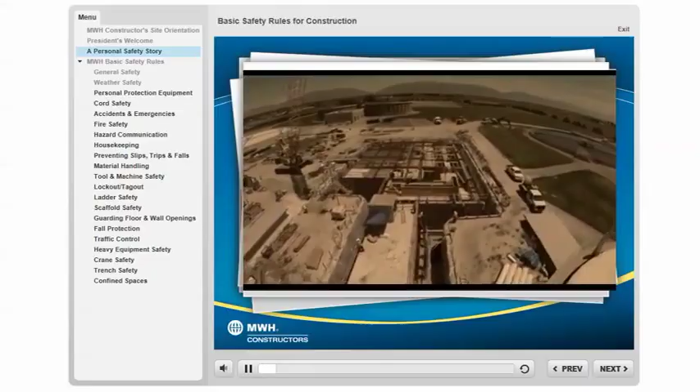At this point, we're 2 years into construction. The job is going well. In fact, the only significant piece of work we have left to complete is the new headworks facility.

March 24th begins like every other day on the construction project with a 7 a.m. safety meeting. The weather that morning was a mixture of sleet and snow and rain, but that's not unusual for Ogden during the winter. And so when the safety meeting completed, work began as usual.

I made my way back to the office trailers. At 8:30 that morning, I got a call from our superintendent down at the headworks facility. He said, 'Ben, there's been an accident and emergency personnel are on their way.'

So I immediately made my way down to the headworks, and it was there that I found one of our construction employees on the ground, and the MWH safety professional was giving CPR.

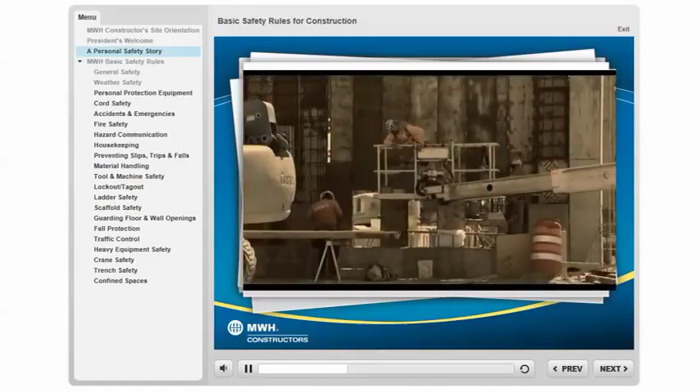The employee's name is Jeremiah. Jeremiah is the foreman for our masonry subcontractor. And that morning, Jeremiah and his crew were building a chimney to encase a large exhaust duct.

Now the chimney was quite high, and Jeremiah and his guys were working off scaffolding at about 45 feet in the air.

There weren't any eyewitnesses to the event, but his crew all reported the same thing, which is at one moment Jeremiah was there working with them, building the chimney. The next minute they heard a loud noise and Jeremiah was gone. Jeremiah had fallen from the scaffolding to the ground below.

It wasn't just a couple minutes after I got on the site that emergency paramedics arrived and they took over the CPR.

Within a short time period after that, the Flight for Life helicopter landed. It landed nearby on a flat area, and the paramedics transported Jeremiah over to the helicopter, and I was right behind. When I got to the helicopter, I talked to the paramedics, and that's where I found out that Jeremiah had passed away.

The accident happened on a Thursday. The job site was shut down on a Friday, and I think I spent most of that weekend in shock. The true impact of what had happened didn't hit me until early the following week, and that's when I attended the funeral service. March 24th, 2011, the day that safety took on a very personal meaning for me.

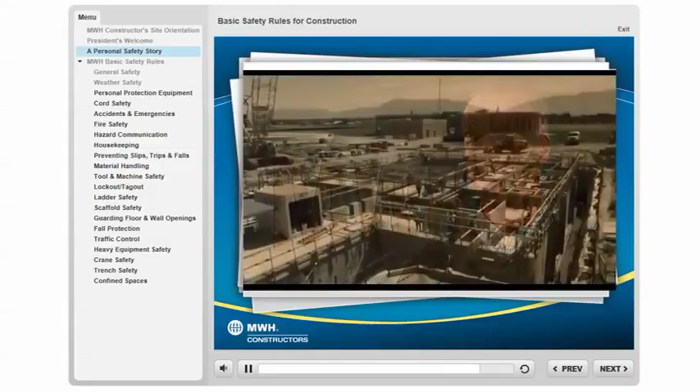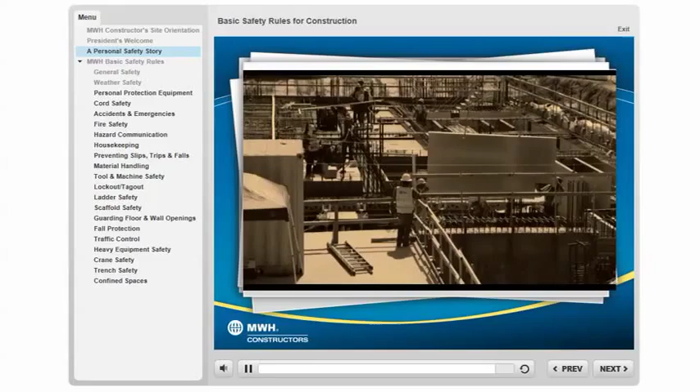In the construction industry, we talk a lot about safety. We talk about the importance of safety planning. We talk about having the right tools and the right equipment. And we talk about how we measure ourselves, days without a lost time incident and other metrics.

All of that's important. But the thing that really matters, the thing that truly matters at the end of the day, is that you go home safely to be with your friends and family.

Basic Safety Rules for Construction, an Employee Orientation and Training Manual by MWH Constructors, Building a Better World.

You have all received your copy in either English or Spanish of the MWH Basic Safety Rules for Construction book. We are going to spend the next 50 minutes reviewing the safety rules outlined in this book. Please pay close attention. At the conclusion of the computer-based training, you will be asked to acknowledge that you have read or have had read to you the rules listed in this handbook.

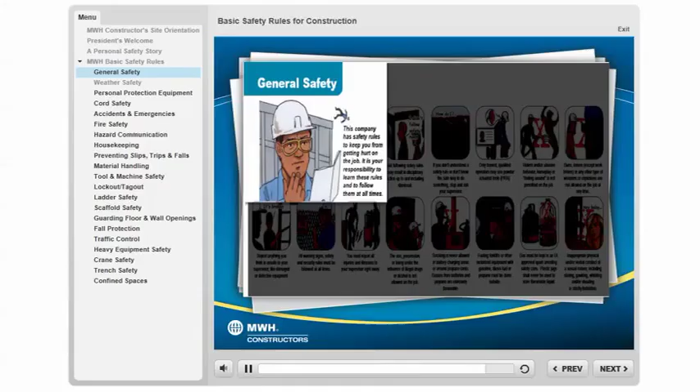General safety. This company has safety rules to keep you from getting hurt on the job. It is your responsibility to learn these rules and follow them at all times. Not following safety rules may result in disciplinary action, up to and including dismissal. If you don't understand a safety rule or don't know the safe way to do something, stop and ask your supervisor. Only trained, qualified operators may use powder-actuated tools, PATs.

Violent and/or abusive behavior, horseplay, or fooling around is not permitted on the job. Guns, knives, except work knives, or other types of weapons or explosives are not allowed on the job at any time.

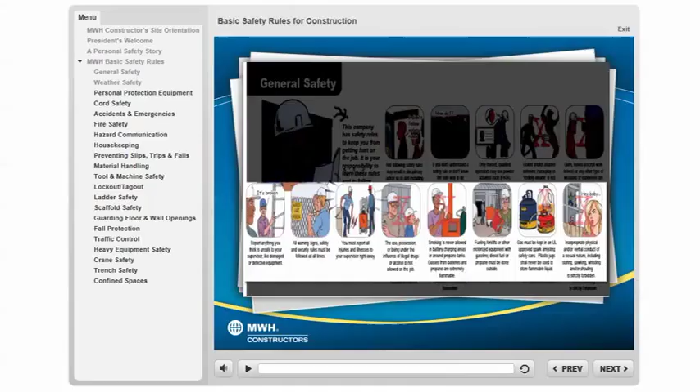Report anything you think is unsafe to your supervisor, like damaged or defective equipment. All warning signs, safety, and security rules must be followed at all times. You must report all injuries and illnesses to your supervisor right away. The use, possession, or being under the influence of illegal drugs or alcohol is not allowed on the job.

Smoking is never allowed in battery charging areas or around propane tanks. Gases from batteries and propane are extremely flammable. Fueling forklifts or other motorized equipment with gasoline, diesel fuel, or propane must be done outside. Gas must be kept in UL-approved spark-arresting safety cans. Plastic jugs shall never be used to store flammable liquid.

Inappropriate physical and/or verbal conduct of a sexual nature, including staring, gawking, whistling, and/or shouting, is strictly prohibited.

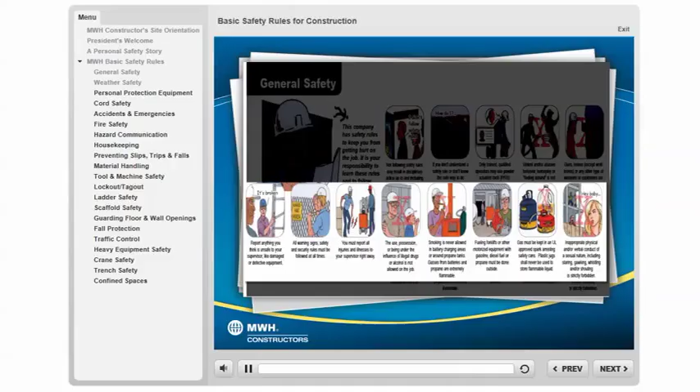Weather safety. Drink plenty of fluids. Dehydration can happen in hot or cold weather. Don't wear tight clothes. They can make your body's job of circulating coolant or antifreeze, which is blood, much harder, like pinching a radiator hose. Don't drink alcoholic beverages before or during work. Alcohol dehydrates or dries out your body and slows your circulation, making you colder or hotter. Avoid smoking cigarettes. Nicotine affects your circulation, making it harder to cool down or warm up.

When it's cold, dress warmly. Use layers of clothes that you can put on or take off as the temperature changes. Don't forget hats, gloves, and warm shoes or boots. Most body heat is lost from your head, hands, and feet. Frostbite and hypothermia are serious conditions. If you think you're getting either, tell your supervisor and get medical attention if necessary.

When it's hot, try to wear lightweight or light-colored clothes. Light colors reflect heat. Dark colors absorb heat. With heat illnesses, you might stop sweating and/or have dizziness, cramps, nausea, and intense thirst. Heat illnesses are serious conditions. If you or one of your coworkers is having heat illness symptoms, get inside or wherever you can cool down. Tell your supervisor and get medical attention if necessary.

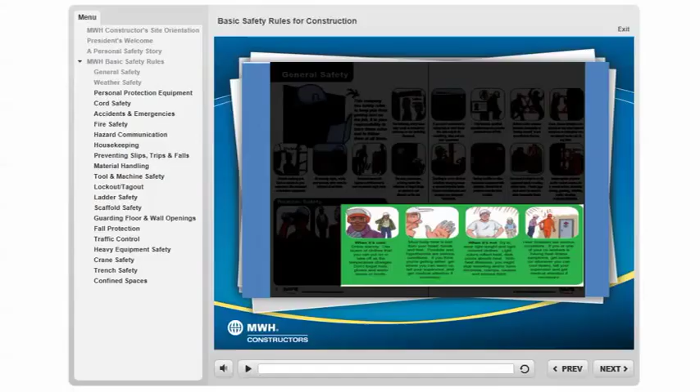PPE, personal protective equipment. There are different types of PPE for different jobs. If you don't know what PPE you should be using, ask your supervisor. There are many kinds of respirators to protect against breathing harmful dusts, mists, and fumes. Respirators don't work if they don't fit properly. Fit test your respirator before each use.

Number 1, put on the respirator. Number 2, cup your hands over the mask or otherwise block the flow of air into the mask. Number 3, breathe in deeply. The mask should collapse towards your face. When you breathe out, the mask should remain sealed on your face. It fits if it doesn't leak air from around the edges when you breathe in and out. If it doesn't fit, tell your supervisor.

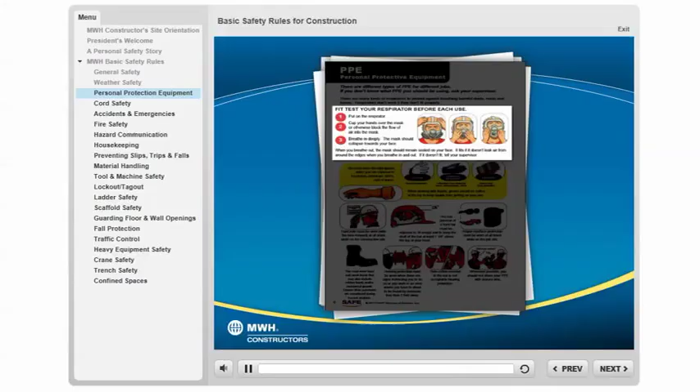You must wear the right gloves when you are exposed to hazardous chemicals, BBPs, cuts, or burns. Cotton, general protection. Chemical resistant, protection from chemical burns, harmful liquids, BBPs. Leather, heavy-duty, dry protection. When working with liquids, gloves should be cuffed at the top to keep liquids from getting on your arm.

Hard hats must be worn with the brim forward at all times while on the construction site. The suspension of a hard hat must be adjusted to fit snugly and to keep the shell of the hat at least 1 1/4 inch above the top of your head. Proper eye-face protection must be worn at all times while on the job site.

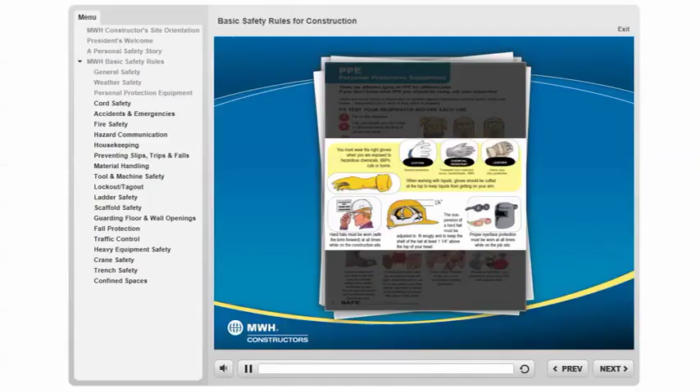You must wear hard-soled work boots that may also include rubber boots and/or metatarsal guards. Ensure shoe punctures are considered during hazard analysis. Hearing protection must be worn where there are signs instructing you to do so, or you work in an area where you have to shout to be heard by someone less than 2 feet away. Plain cotton inserted in the ear is not acceptable hearing protection. Whenever possible, you should not share your PPE with anyone else.

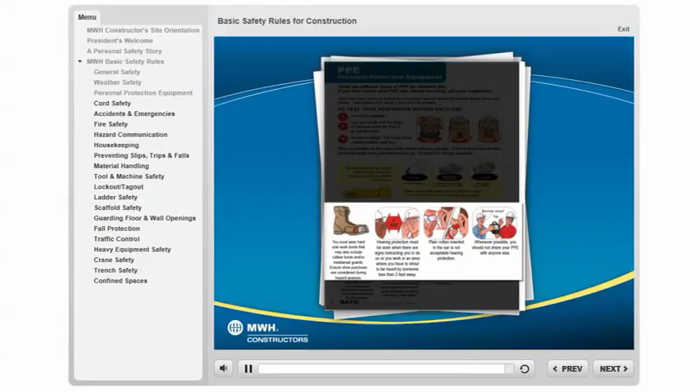Cord safety. The most common cause of on-the-job electrocutions is using the wrong type or damaged extension cords. Check cords carefully before each use.

If a cord is damaged in any way, is missing a grounding pin, or has been spliced together, remove it from service and clearly label or tag it as damaged so no one else can use it. Only use cords that are approved for hard or extra hard service.

These cords will be marked every few feet. Markings include S, ST, SO, STO, SJ, SJO, SJT, and SJTO. Extension cords should not be used as permanent wiring.

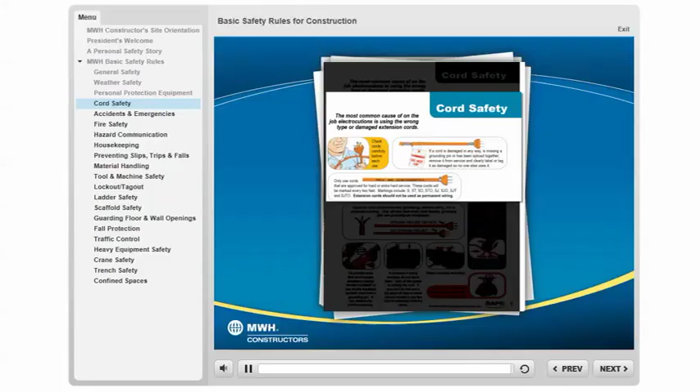If any equipment or cord gives you even a slight shock when you touch it, unplug it and tell your supervisor right away. When using adapters, you must screw the outlet cover plate screw through the grounding lead to ground the connection. Grounding pins will not protect unless they are connected to a grounding pin receptacle.

Approved cords will be 3-wire, grounding, stranded wiring, with a protective covering. They will also have strain relief devices, grounding pins, and grounding pin receptacles.

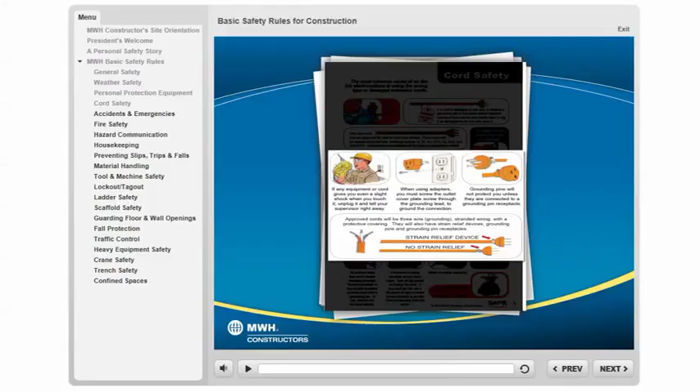To keep cords safe and free of damage, pull the plug, not the cord. Never alter a GFCI or grounding pin. Don't yank cords around sharp corners, and don't leave cords where they can be run over.

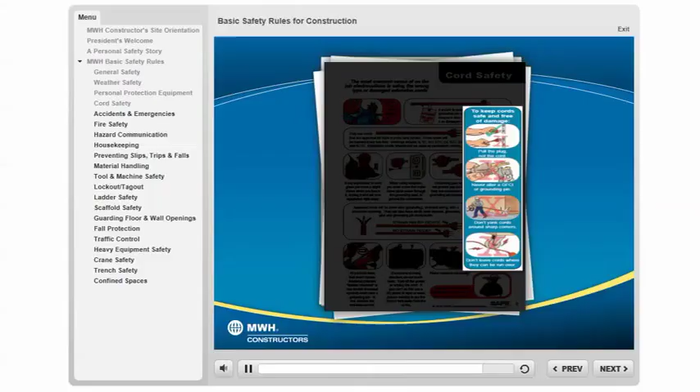All portable tools that are not double insulated or marked double insulated or have double insulated symbols must have a grounding pin. If not, remove the tool from service.

If someone is being shocked, do not touch them. Turn off the power or unplug the cord. If you can't do this, use a dry piece of rope or wood, such as a broom handle, to pry the cord or tool away from the victim.

Water conducts electricity. Use cords long enough for the job. Don't string or connect cords together.

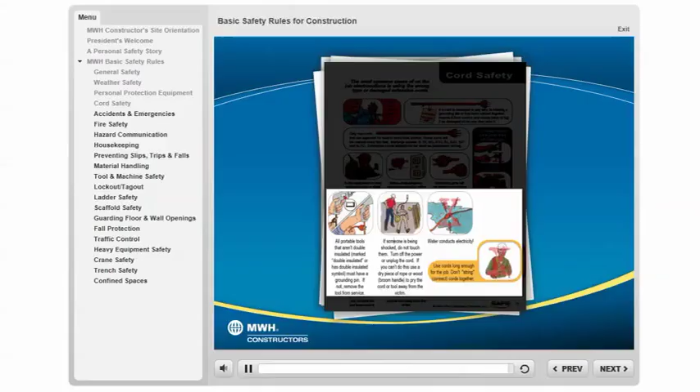Accidents and emergencies. Accidents happen. Being prepared can be the difference between life and death. This company keeps well-stocked first aid kits, fire extinguishers, and posts emergency phone numbers at every job site.

You must know: 1. Where first aid kits are kept. 2. Where phones and emergency numbers are posted. 3. Where fire alarms and/or extinguishers are located. 4. Emergency evacuation routes to get out of the building quickly.

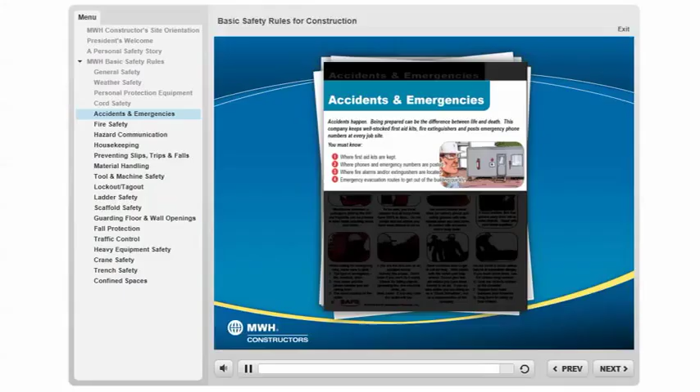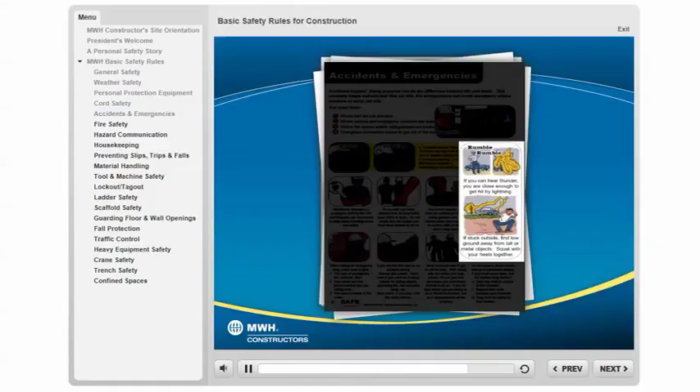If you can hear thunder, you are close enough to get hit by lightning. If stuck outside, find low ground, away from tall or metal objects. Squat with your heels together.

Watch. Warning. A weather watch means conditions are right and that type of weather might happen. A weather warning means that type of weather is happening in the watch area.

Blood-borne diseases or pathogens, BBPs, like HIV and hepatitis, can be present in body fluids, including blood and saliva. To be safe, you must assume that all body fluids have BBPs in them. Do not render first aid unless you have been trained to do so.

You should always wear latex or rubber gloves and safety glasses with side shields when you may come in contact with someone else's body fluids.

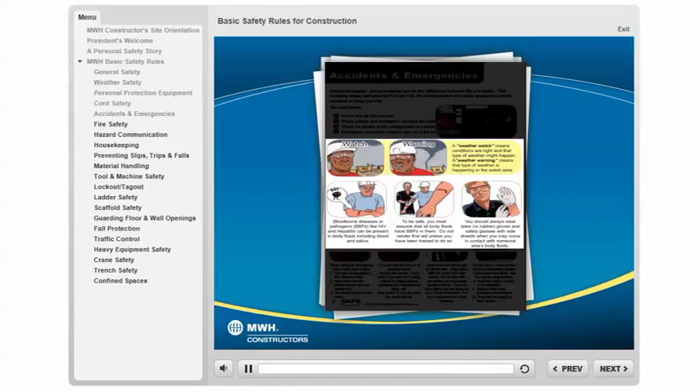When calling for emergency help, make sure to give: 1. The type of emergency, fire, medical, other. 2. Your name and the phone number you are calling from. 3. The exact location of the victim.

If you are the first one on an accident scene, survey the scene. Don't enter if you can't do it safely. Check for falling objects, spreading fire, live electrical wires, and so forth.

Stay calm. If you stay calm, the victim will too. Send someone else to get or call for help. Wait calmly with the victim until help arrives.

Do not give first aid unless you have been trained to do so. If you do take action, you are doing so as a good Samaritan, not as a representative of the company.

Do not move a victim unless they are in immediate danger. If you must move them, use the clothes drag method.

1. Grab the victim's clothes at the shoulder. 2. Support their head between your forearms. 3. Drag them to safety by their clothes.

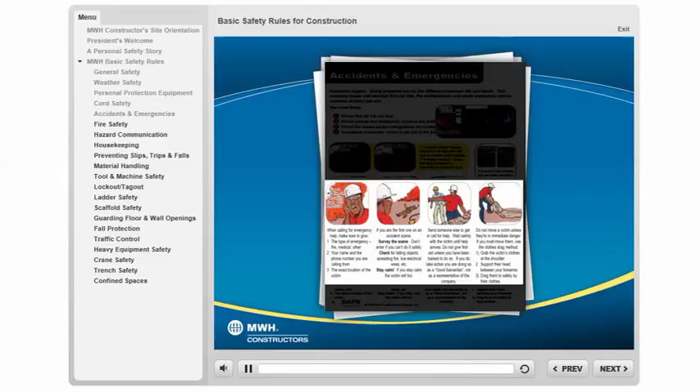Fire safety. Fire needs 4 things to burn. Fuel, anything that will burn, such as solid, liquid, or gas. Heat, the energy to increase the temperature of the fuel to the point the fire starts.

Oxygen, fire needs about 16% oxygen. The air we breathe is about 21%. And chemical chain reaction, when heat, oxygen, and fuel come together in the right amounts and conditions to start a fire. If one of these things is missing, fire will not burn.

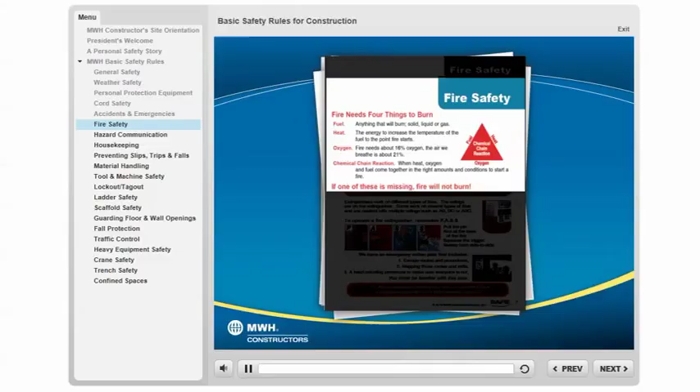There are 3 basic types of fires. They are rated by the type of fuel that is burning. Class A, ordinary solid fuels like paper, wood, cloth, rubber, and some plastics. Class B, flammable liquids or gases like gasoline, paints, propane, etc. Class C, electrical fires. Extinguishers work on different types of fires.

The ratings are on the extinguisher. Some work on several types of fires and are marked with multiple ratings, such as AB, BC, or ABC.

To operate a fire extinguisher, remember PASS. P, pull the pin. A, aim at the base of the fire. S, squeeze the trigger. S, sweep from side to side.

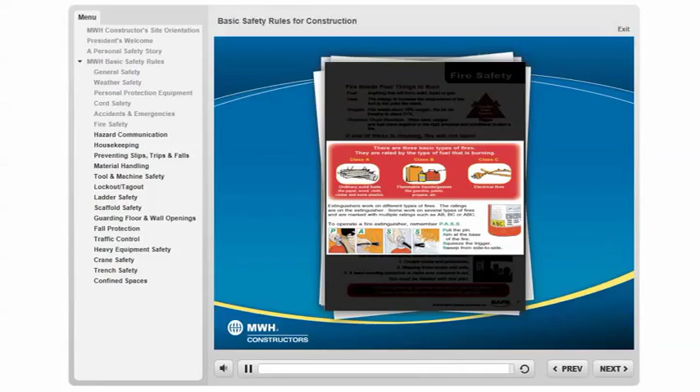We have an emergency action plan that includes escape routes and procedures, mapping these routes and exits, and a head counting procedure to make sure everyone is out. You must be familiar with this plan.

If a fire is spreading, blocking your exit, or you don't have a proper extinguisher, don't take chances. Get out.

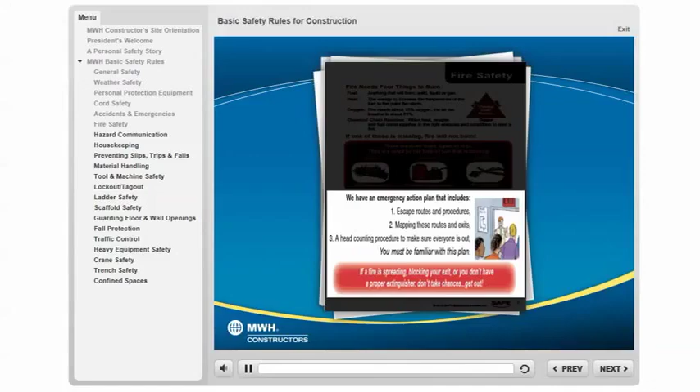Hazard communication. Paint thinner, concrete products, adhesives, coatings, and other chemicals that we use every day may contain chemicals that could hurt you. That is why we have a written Hazard Communication Program, or HAZCOM, that includes hazard evaluation, chemical manufacturers finding out what and how the things they make are hazardous.

Container labeling, making sure that all hazardous materials have product warning labels. Material safety data sheets, MSDSs, have detailed information about the hazardous materials we may handle, and training so that you can do your job safely.

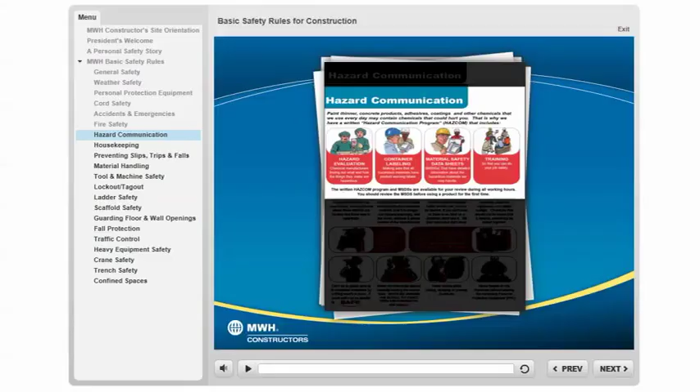The written HAZCOM program and MSDSs are available for your review during all working hours. You should review the MSDS before using a product for the first time. We keep an MSDS on every hazardous material you may handle. You must know where these MSDSs are located and know how to read them.

All hazardous material containers must have labels that describe the hazardous material, how it is dangerous, such as hazard warnings, and the name, address, and phone number of the manufacturer. If something is poured into another container, such as a bottle or bucket, it must be labeled.

If you can't read it, or there is no label on the container, don't use it. Tell your supervisor right away. Don't store chemicals near heat, electrical equipment, or in direct sunlight.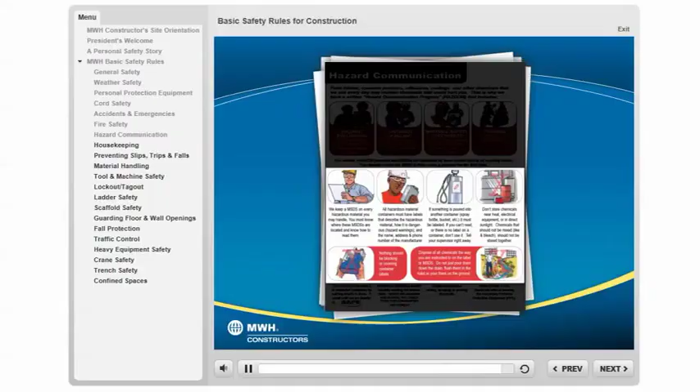Chemicals that should not be mixed, such as ammonia and bleach, should not be stored together. Nothing should be blocking or covering container labels. Dispose of all chemicals the way you are instructed to on the label or MSDS. Do not just pour them down the drain, flush them in the toilet, or pour them on the ground.

Never try to guess what's in unlabeled containers by sniffing what's in them. A small sniff can be deadly. Never mix chemicals without carefully reading the instructions. Never mix ammonia and bleach. The fumes from this combination are deadly.

Never smoke while mixing, spraying, or pouring chemicals. Never handle or mix chemicals without wearing the necessary personal protective equipment, PPE.

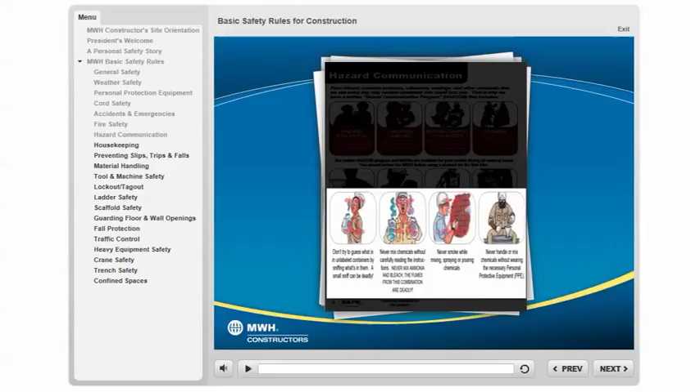Housekeeping. How neat and clean we keep our workplace shows our level of pride and professionalism. It also helps keep our workplace safe. Keep work areas, walkways, stairs, and aisles free of clutter like waste, trash, tools, hoses, and cords.

Secure loose materials and scrap that might blow around, especially on roofs or other heights. Keep debris and stored materials at least 10 feet away from deck edges and at least 6 feet from floor and/or roof openings. Place oily rags and swabs in approved covered receptacles.

Pick up tools, hoses, and so forth after each use. Remove or flatten protruding nails from scrap lumber.

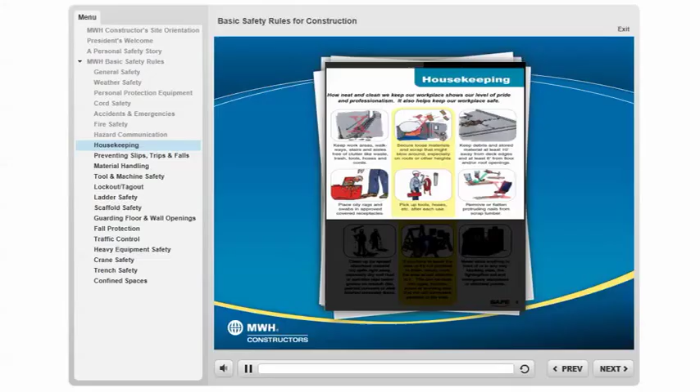Clean up or spread absorbent material on spills right away, especially drywall mud or sprinkler pipe leaks or grease on smooth tile-painted concrete or slick-finished concrete floors.

If you have to leave the area or it's not practical to finish, clearly mark the area to call attention to it. This can be done with signs, buckets, boxes, or anything else that will call someone's attention to the area. Never store anything in front of or in any way blocking exits, firefighting, or first aid and emergency equipment or electrical panels.

Preventing slips, trips, and falls. Most slips happen when either your shoes or what you're walking on is wet or slippery. Be careful if it's snowing, icy, raining, wet, or muddy outside, especially when entering smooth floored areas from outside.

Be extra careful when walking through areas where drywall is being finished or sprinkler heads are being cut. Watch where you step. Check for ice, mud, or other slick spots in front of the door when getting in and out of vehicles. Wear proper slip-resistant shoes that are laced and tied at all times.

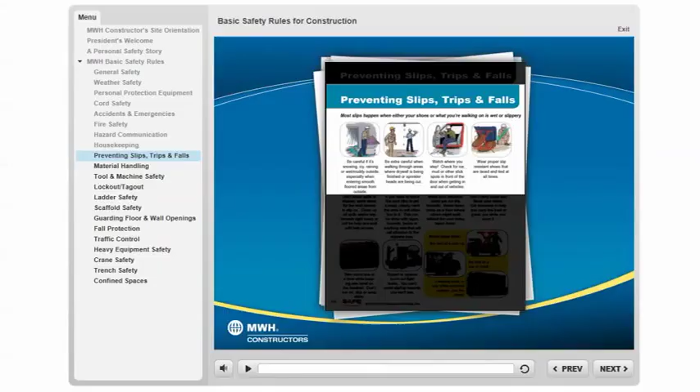Don't leave spills or slippery spots alone for the next person to slip on. Clean up all spills or slip hazards right away, or call for help and wait until help arrives. If you have to leave the spot, like to get a mop, clearly mark the area to call attention to it. This can be done with signs, buckets, boxes, or anything else that will call attention to the slippery area.

Make sure electrical cords are not trip hazards. Never leave cords on the floor where others might walk without the cord being taped down.

Don't carry loads that block your vision. Get someone to help you carry the load or guide you while you carry it. Take stairs one step at a time while keeping one hand on the handrail. Do not run, skip, or jump stairs. Report or replace burned out light bulbs.

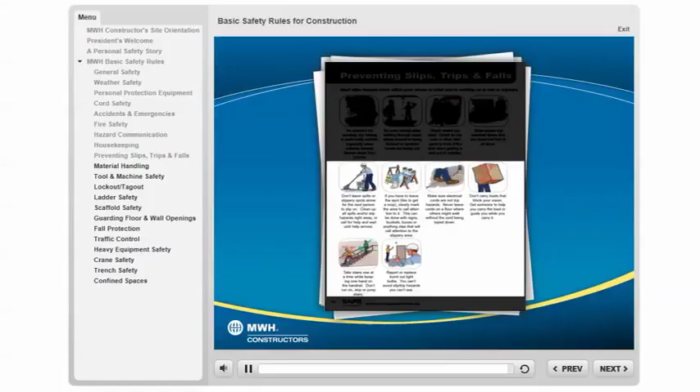You can't avoid slip or trip hazards you can't see. Never jump from the bed of a pickup, the cab of a van or truck, a loading dock, or any other elevated surface. Use the stairs.

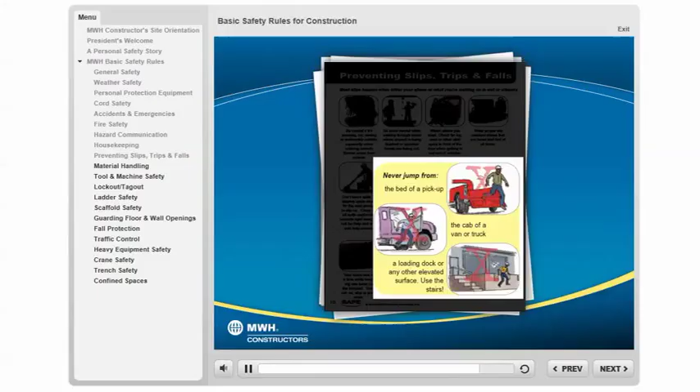Material handling. Lifting light things carelessly and heavy things the wrong way can cause back injuries. When you lift, use proper techniques. Square up to the object as close to it as you can. Your feet should be slightly apart with one foot just behind the other.

Squat down to the load. Bend your knees while keeping your back straight and as close to vertical as possible. Get a good grip using your whole hand, not just your fingers. Gloves should be worn when handling material. Materials to be lifted should be gripped at opposite corners. Lift with your legs while keeping your back vertical and arms and elbows close to your body.

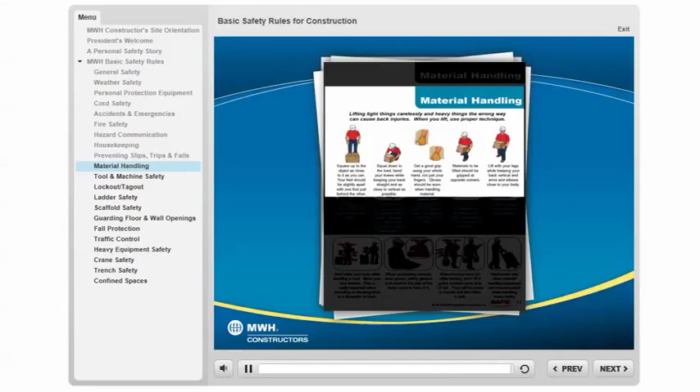Shoveling is the same as lifting, so the same rules apply. Plan before you lift. Check the load for weight, sharp edges, splinters, etc. Make sure your path is free of trip hazards.

If a load is hard to lift and or handle alone, like plywood or sheetrock, get help. Never reach over something to lift something else. Either move what's in your way or go around it. Never lift or handle material by the packing band.

Don't twist your body while handling a load. Move your feet instead. This is really important when shoveling or throwing trash in a dumpster or truck. When unbanding material, wear gloves, safety glasses, and stand to the side of the band, never in front of it.

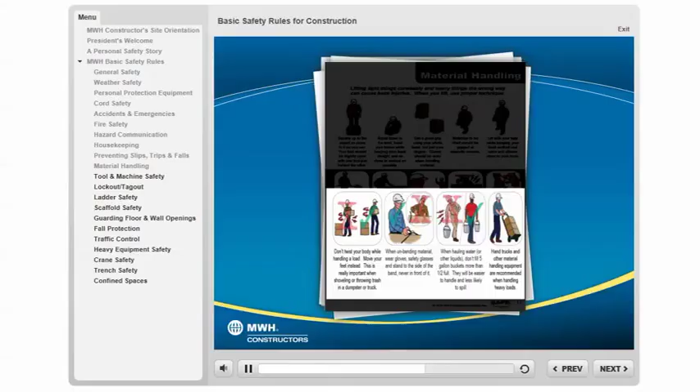When hauling water or other liquid, do not fill 5-gallon buckets more than half full. They will be easier to handle and less likely to spill. Hand trucks and other material handling equipment are recommended when handling heavy loads.

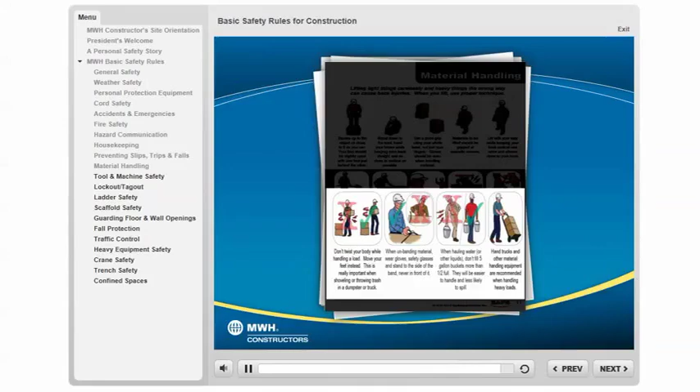Tool and machinery safety. When tools or equipment are designed to have guards, the guard must be on when the tool or equipment is in use. Never alter or bypass machine guards in any way. Ingoing nip points, the point where a belt or chain is pulled onto a gear or wheel, must be guarded.

Grinders must have side shields over the end of the stone or wire wheel, and tool rests within 1/8 inch of the stone or wheel. Circular saws must have guards above and below the base plate that automatically return to the covering position when the saw is pulled out of the work. Keep saw blades adjusted so they are deep enough to do the work, but no deeper. Use push sticks or other hand tools to help keep your hands out of the danger zone.

Carefully inspect all pneumatic tool lines and connections for damage before each use. Make sure pneumatic tools are firmly connected to the hose before using the tool.

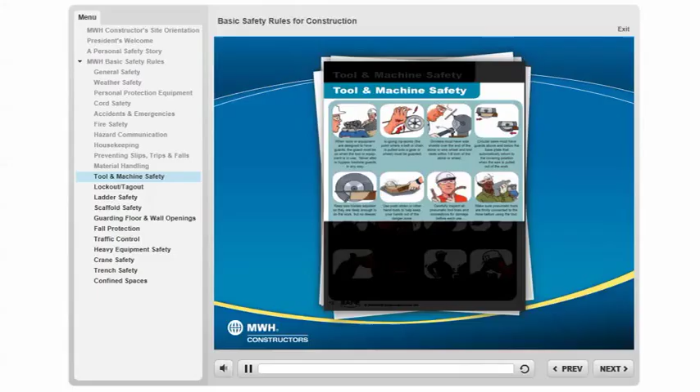Carefully inspect all chains, slings, hooks, and latches before each use. Never use wrenches that have been sprung to the point where slippage occurs. Impact tools, chisels, and so forth must not have mushroomed heads.

Gas cylinders that are not in use must be secured in an upright position with valve protection caps on. Gas cylinders that are in use must be secured in a cart with the regulators attached. Oxygen and acetylene cylinders must be separated by at least 20 feet when not in use.

Don't wear gloves or loose clothing, especially clothes with drawstrings, when working on or with moving machinery. If you have long hair, tie it back or put it up under a hat before working with, on, or around moving machinery.

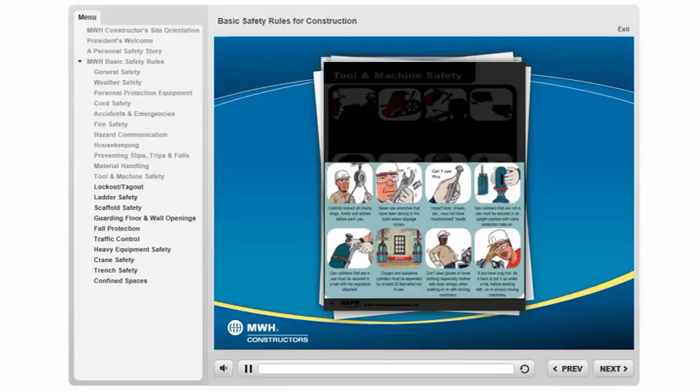Lockout, tagout. If you are in a situation where the unexpected startup of machinery, electrical current, or the release of stored energy could hurt you, lockout, tagout (LOTO) rules must be followed.

1. To LOTO a piece of equipment, turn it off: press stop, flip the switch, close the valve, etc. 2. Isolate it from the energy source: unplug it, flip the circuit breaker off, close the main valve, etc.

3. Put on and lock and/or tag energy control devices. Turn it off, isolate it, lock it. 4. Control stored energy, like that found in springs, hydraulic systems, raised or elevated parts, etc., by repositioning, blocking, or bleeding down.

5. Make sure energy is off, stored energy is controlled, and all moving parts, especially moving saw blades, have stopped before you start working on or near them.

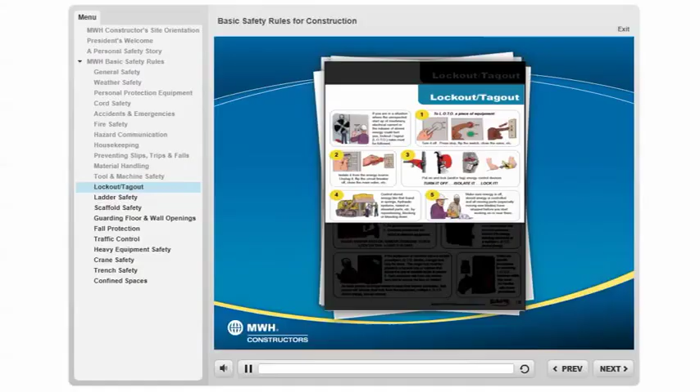Before restarting the equipment, make sure: 1. All tools have been removed. 2. All guards are attached. 3. Everyone knows you are about to start the equipment.

Never tamper with or remove someone else's lock or tag. Leave it alone. If more than one person needs to lock out or tag out equipment, each shall place his or her own personal lock on the energy isolating device or devices, or a multiple LOTO device, HASP. If the equipment or machine will not accept a multiple LOTO device, a single lock may be used. The single key must be placed in a lockout box or cabinet that allows the use of multiple locks to secure it. Each coworker will then use his or her own lock to secure the box or cabinet.

As each person no longer needs to keep their lockout protection, that person will remove their lock from the equipment, multiple LOTO device, HASP, box, or cabinet. There are specific procedures for switching lockout/tagout between shifts. You must be familiar with these procedures.

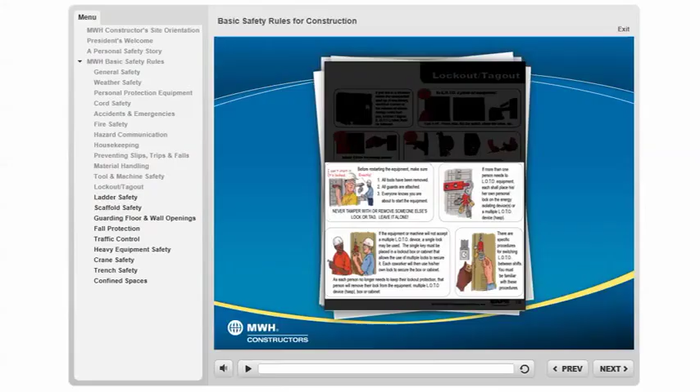Ladder safety. When you need a ladder, use a ladder. Don't use boxes, chairs, or buckets. Set up ladders with the feet 1 foot out from the base of the vertical support for every 4 feet up. The top of the ladder must extend at least 3 feet beyond the landing area. Lock, tie, or otherwise attach the ladder near the top to prevent movement.

Use barricades, cones, or warning tape around the ladder whenever possible. This keeps people from hitting the ladder or getting hit if you drop something. When climbing a ladder, you must keep 3 points of contact with the ladder at all times.

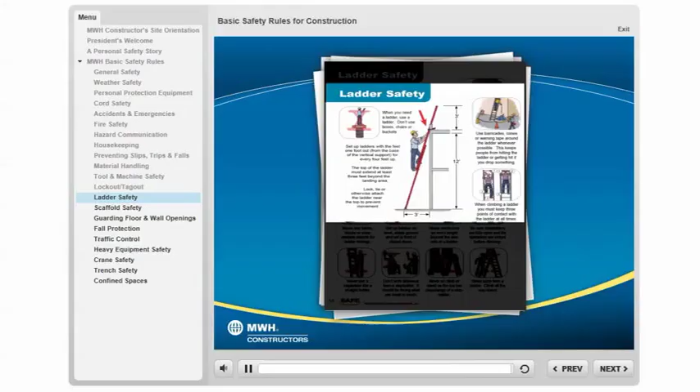Never use bricks, blocks, or other unstable objects for ladder footings. Set up ladders on level, stable ground and not in front of closed doors. Never reach over an arm's length beyond the side rails of a ladder.

Be sure step ladders are fully open and the spreaders are locked before climbing. Never use a step ladder like a straight ladder. Don't work sideways from a step ladder. It should be facing what you need to reach.

Never sit, climb, or stand on the top 2 steps or rungs of a step ladder. Never jump from a ladder. Climb all the way down.

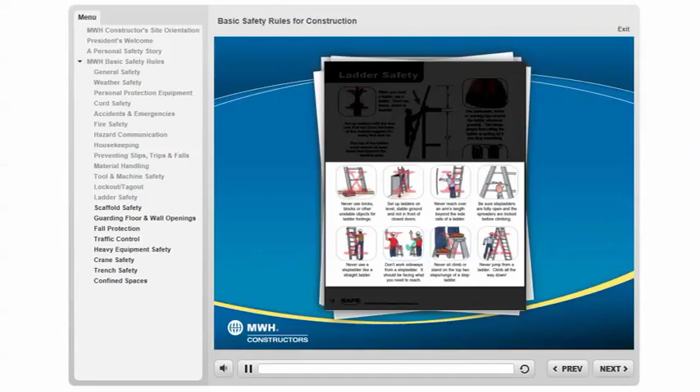Scaffold safety. All scaffolds 10 feet or more above the floor must have the following on all open sides and ends: minimum requirements. Baker requires all of the following, or 100% tie-off requirements shall be met.

A top rail 38 to 45 inches above the work platform. A mid-rail halfway between the top rail and the work platform. A toe board at least 3 1/2 inches high. A screen with holes no bigger than 1/2 inch must be installed between the toe boards and the top rail on all scaffolds where people work or pass underneath.

Railings must be supported at a maximum of every 8 feet. Guardrails are not required on the side of a scaffold platform that is less than 14 inches from the face of the work.

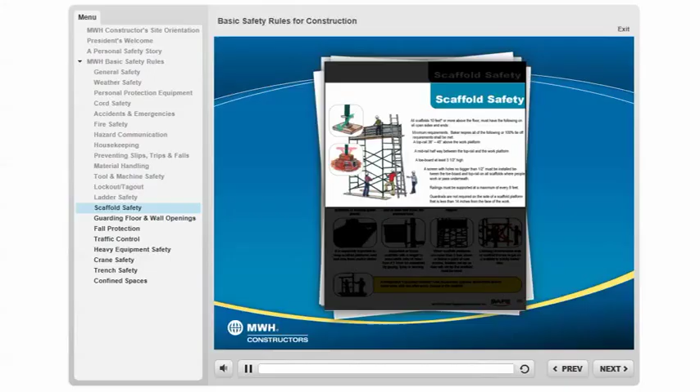Work platforms must be at least 18 inches wide. They may be either fabricated scaffold platforms or scaffold-grade planks. Scaffold platforms must be able to support without failure their own weight and at least 4 times the intended load.

Planks must extend at least 6 inches, but no more than 18 inches beyond the end of their support. Scaffold planks should overlap a minimum of 12 inches. It is especially important to keep scaffold platforms neat and free of trash and/or clutter.

Supported or framed scaffolds with a height-to-base width ratio of more than 4 to 1 must be restrained by guying, tying, or bracing. When scaffold platforms are more than 2 feet above or below a point of safe access, ladders set up so they will not tip the scaffold must be used. Climbing cross braces and/or scaffold frames to get on a scaffold is strictly forbidden.

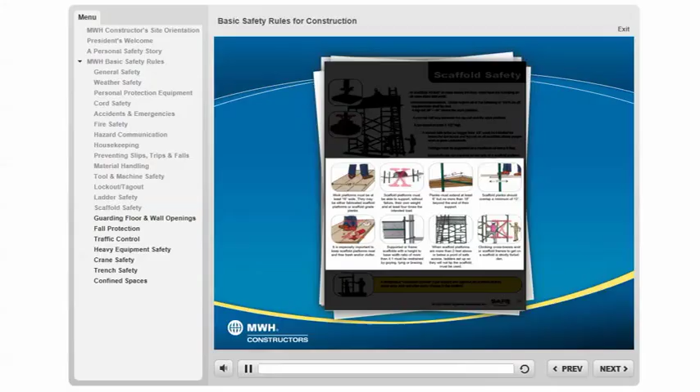A designated, competent person must inspect and approve all scaffolds before every work shift and after every change in the scaffold.

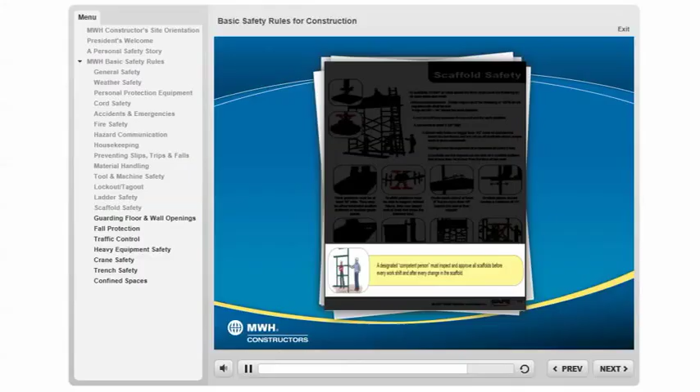Guarding floor and wall openings. All open-sided floors and/or openings where someone could fall 6 feet or more need a standard guarding system. Standard guarding systems include a top rail between 39 inches and 45 inches above the work surface, a mid-rail halfway between the top rail and the work surface, and toe boards when falling material may cause a hazard.

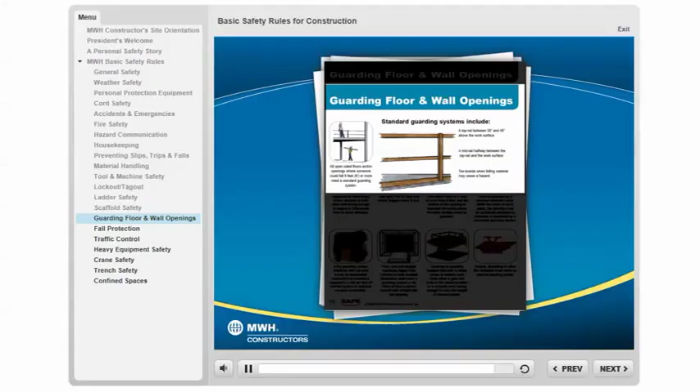Guardrails must be supported at least every 8 feet, secured at both ends, and strong enough to support a 200-pound force in every direction. Wire rope guarding must be kept tight, free of sags, and clearly flagged every 6 feet.

Every window wall opening from which there is a drop of more than 6 feet, and the bottom of the opening is less than 39 inches above the work surface, must be guarded.

Every manhole opening must be guarded by a standard manhole cover. While the cover is not in place, the opening must be constantly attended by someone or protected by a removable guarding system. If the guarding system interferes with the work, it may be temporarily removed if all co-workers exposed to a fall are tied off and the system is replaced as soon as possible.

Floor, roof, and skylight openings bigger than 2 inches in their smallest dimension must have a guarding system or be offset so that a person cannot walk straight into the opening.

Openings in guarding systems that lead to stairs, ramps, or ladders must have either a gate that locks in the closed position or a secured cover strong enough to carry the weight of several people. Drywall, sheathing, or other like materials must never be used as opening covers.

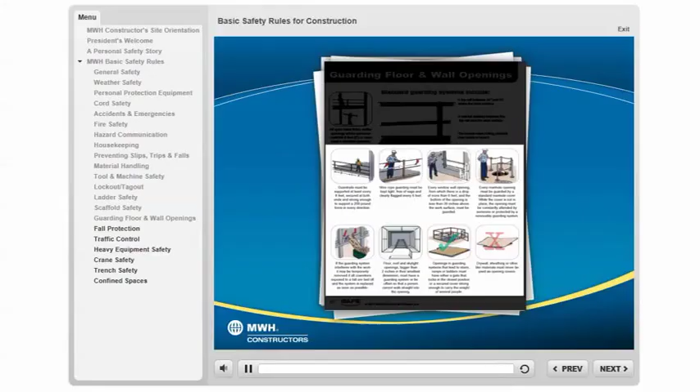Fall protection is required when co-workers could fall 6 feet or more. Certain specific activities like steel erection have different minimum height requirements. If you are unsure about the type and/or need for fall protection, ask your supervisor. Fall protection is required regardless of height when co-workers are working above or next to dangerous equipment.

Conventional types of fall protection include guardrail systems, covers, safety nets, and personal fall arrest (PFA) systems. Before using personal fall arrest equipment, you must be trained. You'll need to know the equipment's limits, proper hookup, anchoring, and tie-off techniques. You must also be trained so that you know how to safely use, inspect, and store the equipment.

Body belts and non-locking snap hooks are not acceptable as part of a personal fall arrest system. Carefully inspect all fall protection equipment before each use. Don't use damaged equipment. Return it to your supervisor right away.

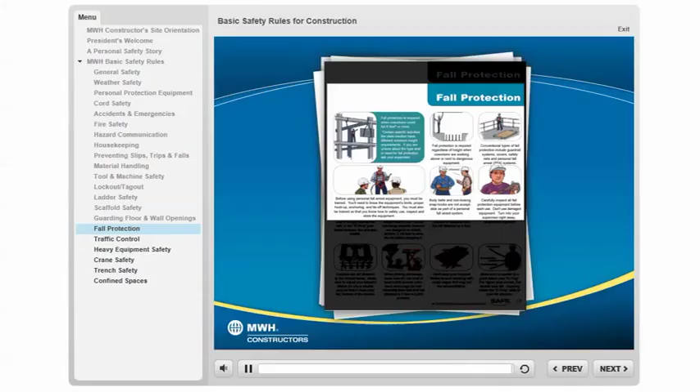Adjust harnesses so they fit snugly with the flat side of the D-ring positioned between the shoulder blades. Free fall length must be no longer than 6 feet. Shock-absorbing lanyards, however, are designed to stretch another 3.5 feet to slow the fall before stopping it. Most self-retracting lifelines or lanyards limit the fall distance to 2 feet.

Never connect 2 snap hooks together. Consider the fall distance to the hazard below. Make sure to adjust your lanyard lifeline or use a shorter one so that it stops your fall instead of the hazard. When picking anchorage, make sure it can hold at least 5,000 pounds. Minimum anchorage for self-retracting lines that limit fall distance to 2 feet is 3,000 pounds.

Don't wrap your lanyard or lifeline around anything with sharp edges that may cut it. Make sure to anchor to a point above your D-ring. The higher your anchor, the shorter your fall. Anything below the D-ring adds to your fall distance.

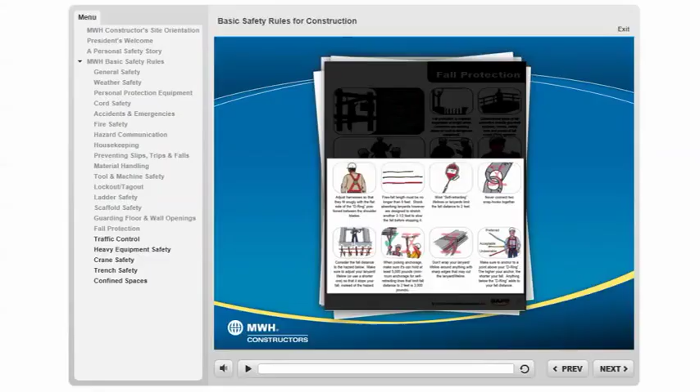Traffic control. Working on our nation's roads and highways is one of the most dangerous occupations in the country. That is why we have developed a written traffic control plan that addresses workers, pedestrians, and drivers.

All co-workers are required to wear orange or fluorescent reflective at-night vests that make them visible from a distance of at least 1,000 feet. If you are working as a flagger, you must be certified. Never stand directly in front of or turn your back on an oncoming vehicle.

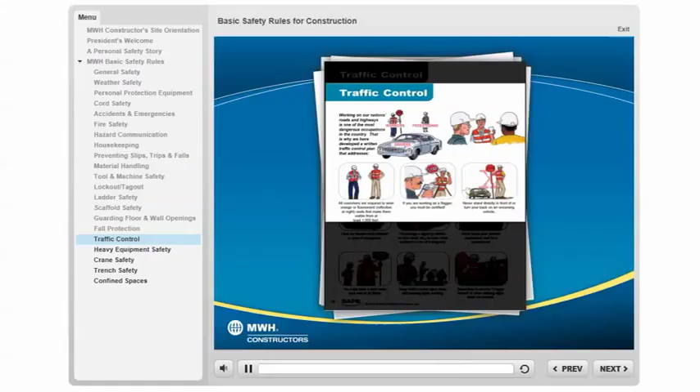Have an escape route planned in case of emergency. Pre-arrange a signal—a whistle, air horn blast, or something like that—to warn other workers in case of an emergency. Never leave your position unattended; wait for a replacement. You must wear a shirt under your vest at all times. Keep traffic control signs clean and warning lights working. Remember to remove flagger ahead or warning signs when not needed.

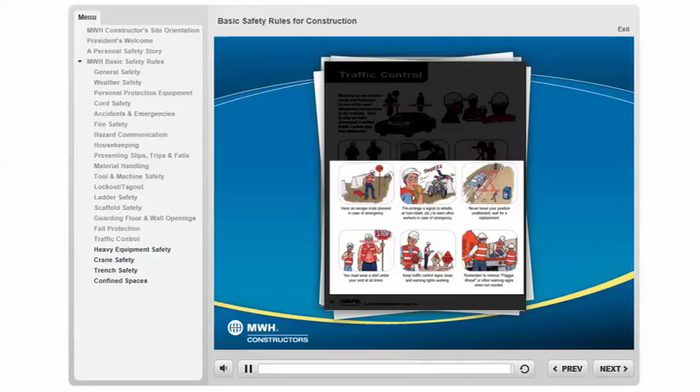Heavy equipment safety. Never operate equipment of any kind unless you have been trained to do so. Equipment must be kept in good working order. If it is damaged, defective, or not running right, tell your supervisor right away. If the equipment has rollover protection (ROPS), seat belts must be worn whenever the equipment is being used.

All machines must be turned off, raisable parts lowered, and brakes set when they are not in use or unattended. Equipment operators must make sure backup alarms work properly at all times. Operators must secure all loose items in their equipment cab. Be careful around heavy equipment, especially when wearing hearing protection or headphones. Never distract equipment operators.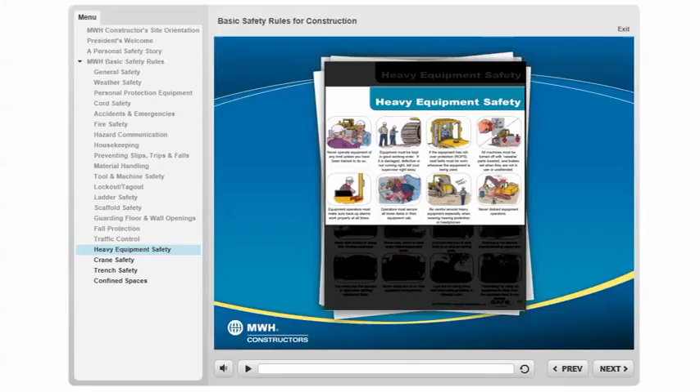Never jump from the cab of a van or truck. Always maintain 3 points of contact when getting on or off, or in or out of, vehicles and equipment. Never walk behind or alongside moving equipment. Never walk, stand, or work under raised or suspended loads. Do not put any part of your body in or around moving parts.

Smoking is not allowed around refueling equipment. You must keep the operator in sight when guiding equipment back. Never stand next to or near equipment being loaded. Look out for falling trees and limbs while grubbing or clearing a site. Hitchhiking or riding on equipment other than in the operator's seat is not allowed.

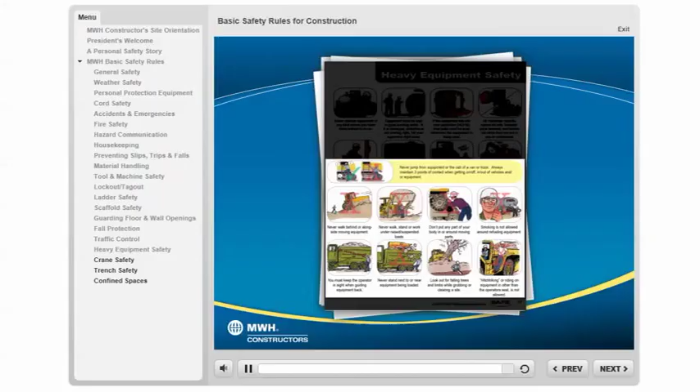Crane safety. Only people who have been specifically trained and certified are permitted to operate cranes. Barricades around the swing area of a revolving cab must be used when operating a crane in areas where pedestrians or traffic pass close by. Never operate cranes closer than 10 feet from power lines. Lines carrying greater than 50,000 volts require greater distances.

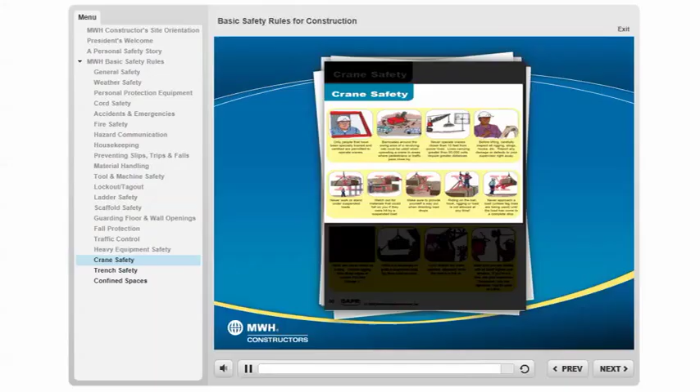Before lifting, carefully inspect all rigging, slings, hooks, etc. Report any damage or defects to your supervisor right away. Never work or stand under suspended loads. Watch out for materials that could fall on you if they were hit by a suspended load. Make sure to provide yourself a way out when directing load drops. Riding on the ball, hook, rigging, or load is not allowed at any time. Never approach a load unless tag lines are being used, until the load has come to a complete stop.

Never use crane cables as a sling; cushion rigging from sharp edges or corners that may damage it. When it is necessary to guide a suspended load, tag lines must be used. Don't distract the crane operator, especially while the load is in the air. Make sure you are familiar with all hand signals and whistles. If you are not sure, ask your supervisor. Remember, only one signalman may be used at a time.

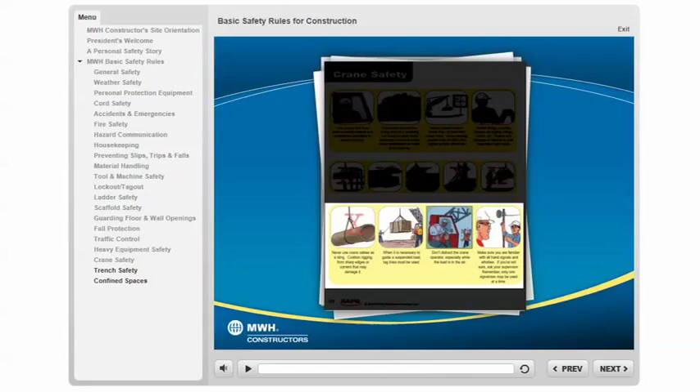Trench safety. Locate all underground utilities before digging. Call the Utilities Protection Center, UPC, at least 72 hours before digging to have utility companies mark their lines.

When digging, make sure to keep all excavated materials and other stored materials at least 2 feet from the edge of the trench. Make sure to direct surface water and rain runoff away from the trench. Use barricades, signs, and/or stop logs to keep traffic and equipment away from the edge of the trench. Any trench 5 feet or deeper must be sloped, benched, shored, or shielded.

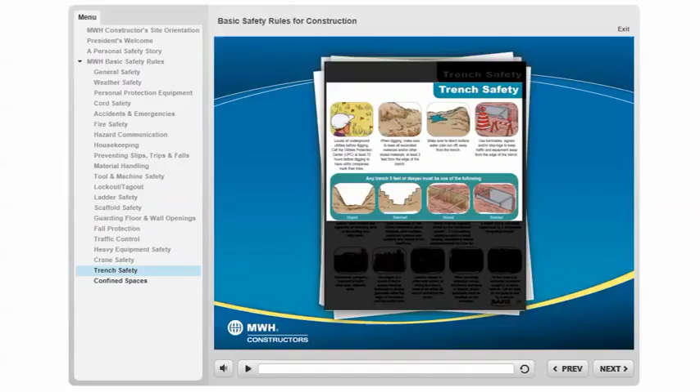A designated competent person must inspect and supervise all trenching and excavating on a daily basis. The competent person must have knowledge of the OSHA codes or rules about trenches, soils analysis, protective systems, and authority and control of the workforce. The air in and around a trench must be regularly tested by the competent person. If a hazardous condition exists or could develop, emergency rescue equipment must be close by. You should never get in a trench that is not being supervised by a designated competent person.

Remember, everyone exposed to traffic must wear reflective vests. The edges of a trench 6 feet or deeper must be protected by proper guardrails when the edge of the trench can't easily be seen. Ladders, ramps, or other safe means of exiting the trench need to be within 25 feet of workers in the trench. When providing walkways across trenches 6 feet deep or deeper, proper guardrails must be installed on the walkways.

In the event you encounter someone caught in a trench cave-in, call for help. Do not jump in and try a rescue.

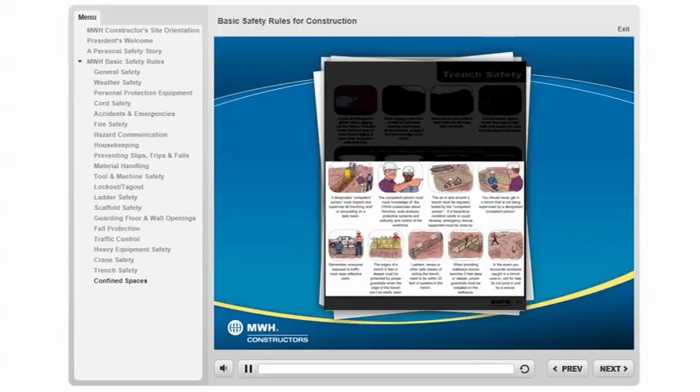Confined spaces. A confined space is large enough to enter, hard to get in and out of, and can't be worked in for long periods of time. Examples of confined spaces include trenches, tanks, elevator shafts, and boilers. Some confined space dangers include not enough oxygen in the air, and flammable or poisoned air.

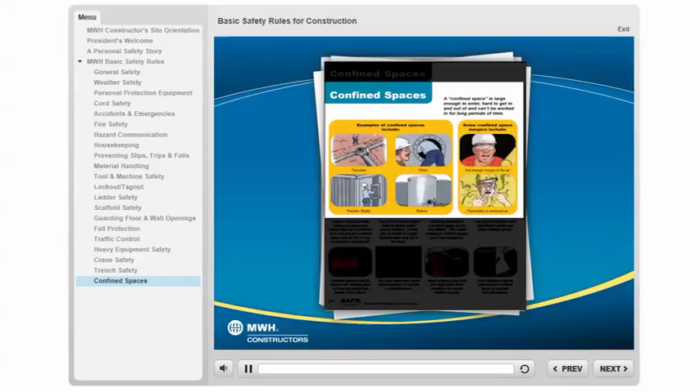Keep in mind that many poisonous gases are heavier than air, so while the air in one part of the confined space may be okay, it may be deadly in another part. The air in a confined space must be tested before anyone enters, and must also be tested at regular intervals while they are in the space. Rescuing someone in a confined space can be very difficult. This makes working in confined spaces even more dangerous.

Only people who have been specifically trained may enter confined spaces. Confined spaces must be marked with warning signs to keep out people that haven't been trained. You must never work alone when working in or around a confined space. Never smoke or use tools that might spark when working in or around confined spaces. Don't attempt to rescue someone in a confined space by yourself. Get help instead.